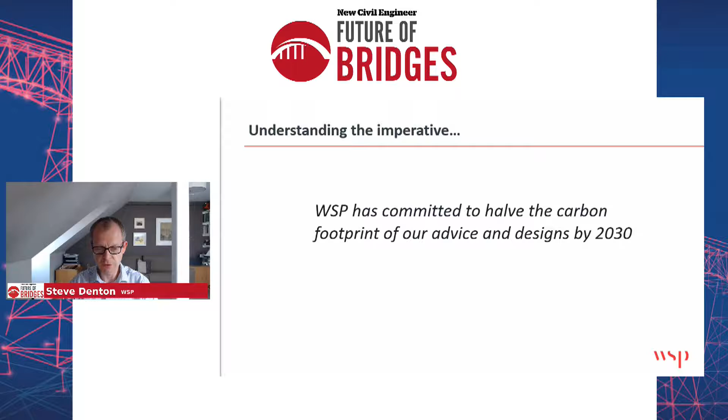My objective today is not to provide a call to arms. My colleague Rachel Skinner did that brilliantly in her presidential address for the ICE. Actually, my plan today is to focus more on how. Having been active in this area for a while, it's clear to me that we absolutely don't have all of the answers, nor are there necessarily easy answers. But it's also very clear that we can't wait until we have those answers before we take some action. For me, it's clear that we have to challenge and we need to adapt our thinking, which echoes very much what Liz was just saying. And this is what I intend to focus on today.

So I'm going to do this in 5 parts. To start off with some background, talk about the quest for precision being the enemy of progress. I want to talk about carbon conscious design, ask that question, what do we design for? And then a few slides at the end around embedding change.

To start with that background, like Liz, I think it's helpful to start with a little bit of personal background, particularly because I've often been asked to speak on other topics, but a little less on this one, although it is an area in which I've done quite a lot of work over the last decade or so. Perhaps dating back significantly to when I led the team that supported Highways England in developing their first climate change adaptation strategy and framework.

Or the work that I've been doing as part of the evolution of the Eurocode, looking at how we embrace climate change within that suite of standards. Or more recently, leading the second work stream for the ICE's carbon project, engaging with colleagues in our carbon reduction efforts at WSP, and also through academic links, looking at research and academic collaborations.

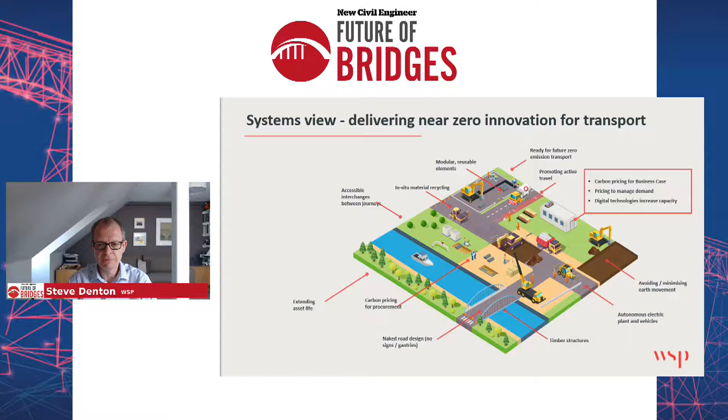The other point I wanted to make in terms of background is I think it would be remiss of me to talk on this subject without recognizing the importance of taking a systems view. This was recognized in the third work stream of the ICE carbon project. It's widely acknowledged. Whilst it's important that we look to optimize what we do within individual subsystems, we have to be careful that we don't optimize a subsystem but drive unintended consequences for other parts of the overall system. So that systems thinking perspective is clearly vital as we think particularly around carbon reduction.

Now I want to move on and ask this question: can a quest for precision be the enemy of progress? It was quite natural when, as WSP, we set that target to say, well, the first thing we need to do if we're going to halve something is to understand precisely where we are today. How can you achieve that target unless we have that granularity of understanding?

And that aligns very much with the sense of we can manage what we measure. And it aligns with the need to be able to benchmark and calculate the carbon consequences of what we do.

But I think what I've seen in this area is a little bit of a risk as well, because carbon calculations, carbon benchmarking has a number of challenges, particularly going back to that systems thinking perspective I was talking about, where a wholly asset-centric approach is inappropriate for transportation systems.

But also, I think in terms of bridge engineering, one of the biggest contributions we can make is actually around life extension of existing assets and how that can be enabled. But how do we measure the carbon impacts of that kind of effort?

It becomes a kind of carbon avoidance, and we know that we need to be really careful in how we think about carbon avoidance, because as people will have seen in the press, you can get it very wrong, and so we have to think hard around that.

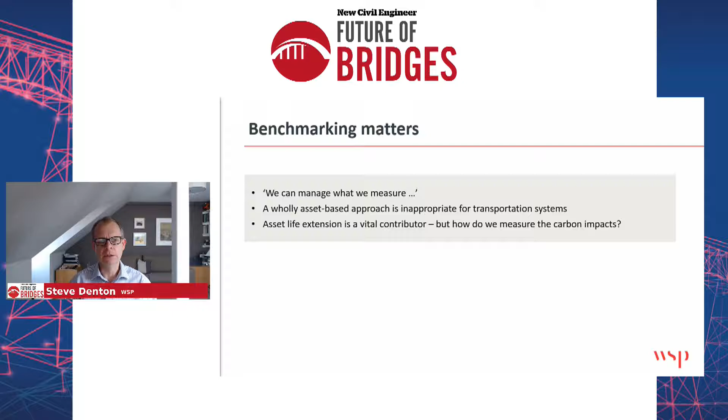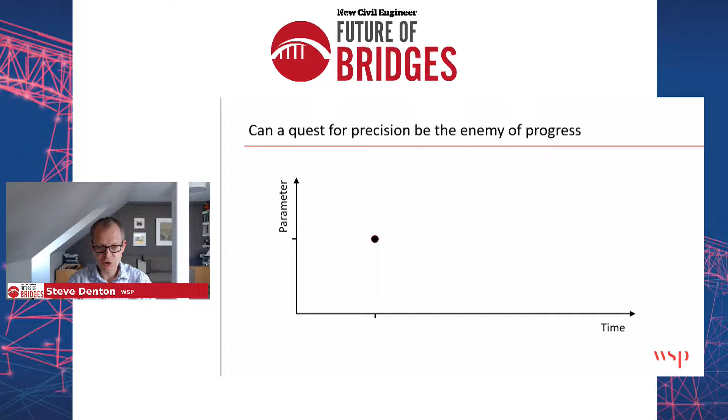So there are questions around this, and benchmarking is complicated. And I think what I observe is that sometimes we can spend a lot of time thinking around how can we measure this with precision, and agonize over achieving that precision, perhaps not thinking what the bigger picture is, which is that we need to achieve change.

And if we just focus on a particular point in time, how do we know which trajectory we're following, or even whether we're following the wrong trajectory?

And that's why I think our efforts, and actually one of the positive consequences of setting a target and thinking hard about it, is that we do need to think about how do we accelerate change.

And again, just to share with you within WSP, we've embraced a set of clear principles, following best practices in terms of how we do our carbon calculations. But in parallel with that, we're currently scoping 8 internally funded research and innovation projects where we're looking to collaborate with others to really accelerate change.

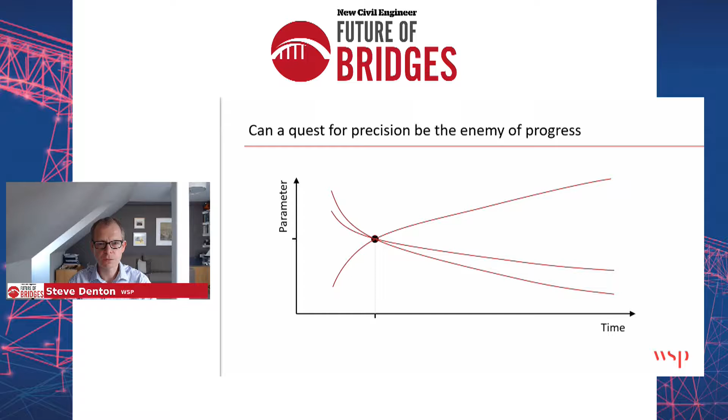Let me move on to the next topic I wanted to touch on, around enabling carbon conscious design.

So I said that part of my focus today wanted to be in that territory of how. And I guess through my career, one of the things that I've seen change is the different consciousnesses that we bring to our design activities.

So I guess there's always been cost consciousness, but I've seen increasing focus on consciousness around buildability, safety consciousness, maintainability consciousness, durability consciousness, the whole family of consciousnesses that we bring to our engineering activity.

And I think where we need to get to is to be elevating that carbon consciousness. And I think a key part here, and the point around that idea of consciousnesses, is that if we wait until the end, if we design something and then we benchmark later, we've really lost the opportunity to have impact.

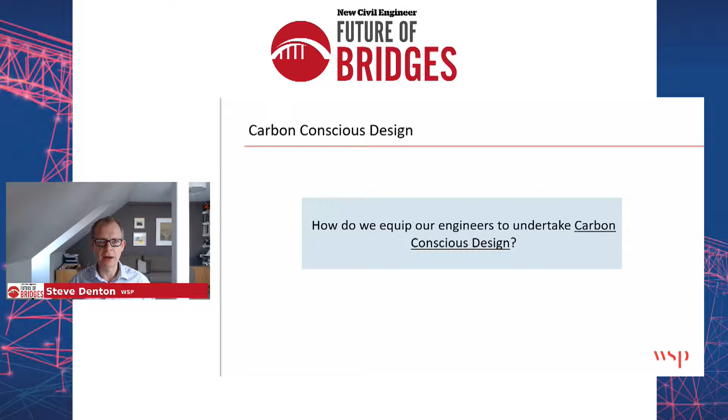The point about cost consciousness is that we think about how can we design economically long before things go out to tender and we get prices back from contractors, for example. How do we elevate and bring that idea of carbon consciousness into our design and other bridge engineering activities?

And very similar concepts of carbon hierarchy are included within PAS 2080, which many of you will no doubt be familiar with. But I think from a bridge engineering perspective, it starts to help us to understand what that consciousness might look like, and I think opens up some really exciting challenges for us.

So at the bottom end, around building efficiently, how do we use less material?

I think it's very interesting when we look through the history of civil and structural engineering that at times when materials were in short supply or were disproportionately expensive, and therefore material efficiency was a real drive, it actually led, I think, to some really exciting times in structural engineering, and often led to some very elegant and beautiful structures being designed because of this desire for material efficiency.

So I think that's a really exciting challenge for us. Building smart, how do we use low carbon materials? How do we make sure that we are fulfilling our same objectives for particularly long life assets whilst reducing the carbon impacts of the materials that we're using?

Or looking higher up the hierarchy, and clearly we need to go higher up the hierarchy to hit the overall targets.

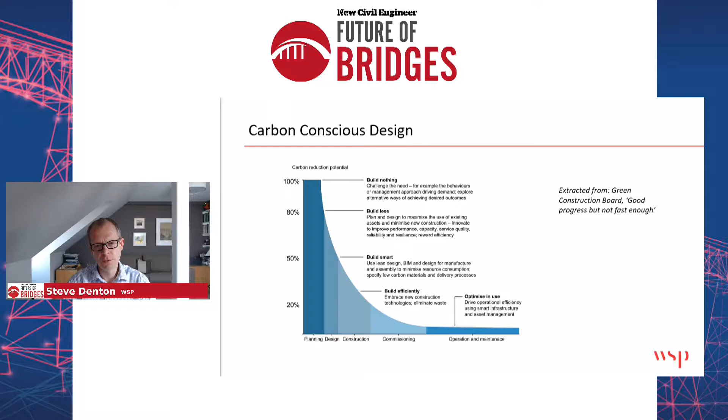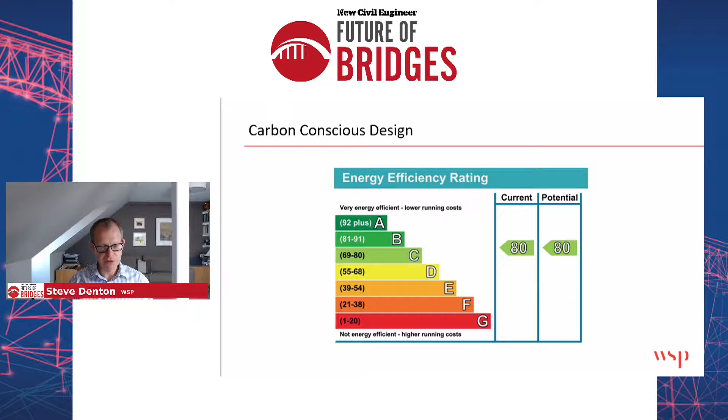I think what we're also looking to do is demystify some of this. We've all seen these: when you buy a washing machine or a house, they come with an energy efficiency rating, a simple device that enables us to rapidly understand the energy efficiency consequences of different things we might use. What we're exploring at WSP is asking, can we do something similar around the carbon consequences of the materials or approaches we might use? How do we make this simple so that at a concept design stage, when a lot of the really important decisions get baked into a project, we can bring that carbon consciousness readily to design at the earliest stages?

Let me move on then. I've touched particularly so far on carbon reduction, and I want to turn now towards climate adaptation, and this builds really nicely on what Liz was saying about change and disruptive change, but also the mega trends that we are seeing.

One of the things we ask all of our people to do within WSP at the start of a project is to pause for a minute and think about whether what we are embarking upon is what we call future ready. That simply means thinking about those trends and asking: is what we're looking at not only suitable today, but also for the future? We're thinking exactly as Liz said, around the trends in demographics, climate, resources, and technology.

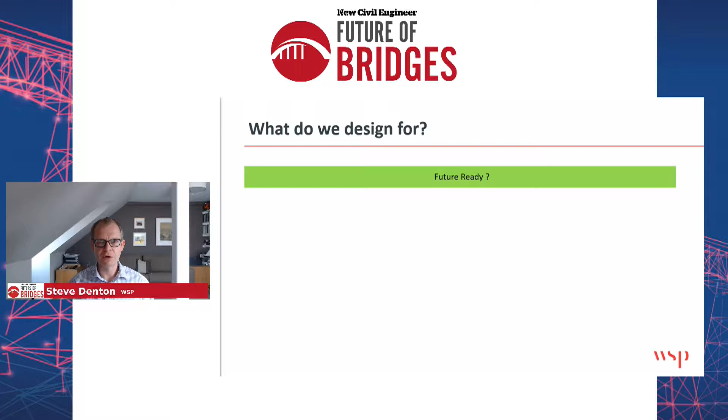What that opens up, I think, is some really interesting opportunity to ask: what do we actually design for? Some of those trends are clear in direction of travel, but the degree to which changes will happen carries uncertainty, particularly for long life assets like bridges. So how do we start thinking differently about design, particularly where the functional demands on what we're looking at over their life will change? We've tended in the past to assume stationarity of climate, for example, and we know in the future that's not something we can rely upon.

So how do we tackle this? Here are four different ways of thinking about the question of what we design for. Do we just design for new defined provisions? I'll come on later to talk briefly about the Eurocodes and their evolution in terms of what we're seeking to do there. But I think there are also some really exciting alternatives.

What about design for adaptability? We don't know exactly what a change might be, but we know there's something we might want to do in the future. Why not create that adaptability in what we design from the outset?

Or design for resilience, where our asset performance is insensitive to change. That's something as bridge engineers we understand because we're used to thinking about robustness. Unplanned or uncertain things might happen, but a structure's resilience to that change, its robustness, is influenced by things like providing continuity within the structure or ductility of elements. These things can be significantly beneficial in terms of the sensitivity, or insensitivity, of assets to change.

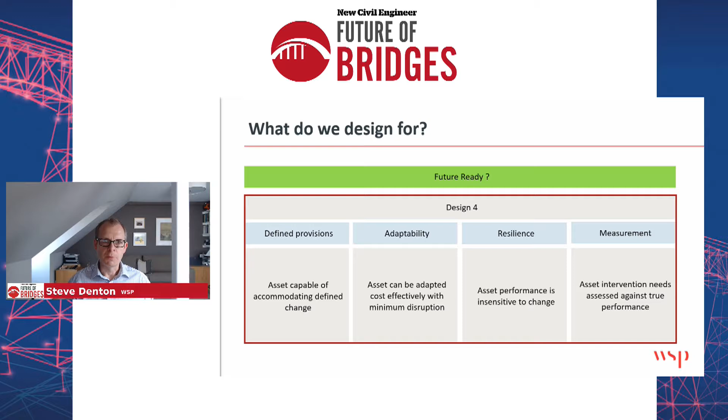I think bringing in some of these different mindsets potentially helps us get away from what might be a vicious circle of worrying about change, over designing, and then potentially using increasing carbon quantities, versus that virtuous circle, which is the one we want to be on.

So let me wrap up and talk a little bit about embedding change. Liz talked about the need for skills within the industry, and I've talked about how we need to equip ourselves as engineers to bring carbon consciousness to the work we do. But we also operate within a framework, a system. We work under contracts, procured in a certain way. Regulations exist, there are standards. One bit of feedback from the ICE work and some surveys was that people feel inhibited sometimes by that framework within which we operate.

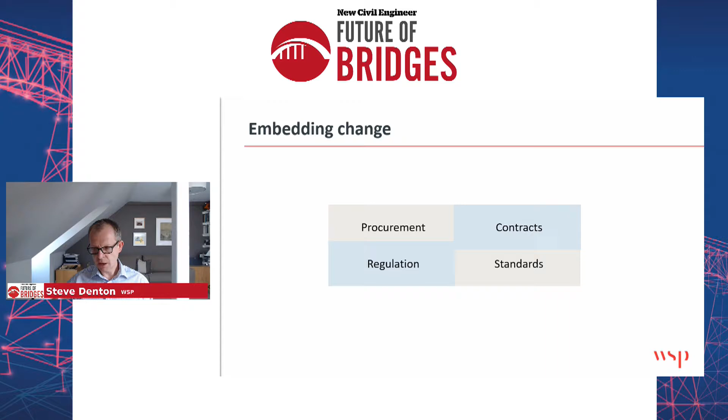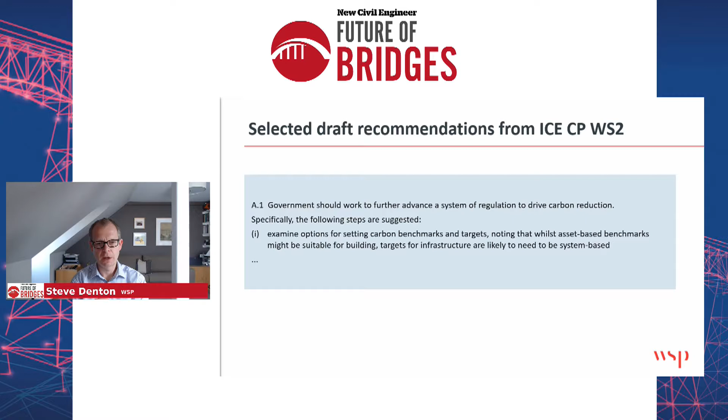Under the ICE Carbon Project, in the section around regulations, standards and contracts that I've been looking at, there are some emerging recommendations. One, that government needs to advance a system of regulation to drive carbon reduction. We've set out specific thoughts here, particularly recognizing that for infrastructure, any such targets or regulation is likely to need a component that's systems-based rather than asset-based, which might work in the property sector.

We've also made a series of recommendations in the standards domain. Firstly, standards developers need to introduce a process of carbon impact assessment for new or revised standards. It's great that Highways England, and I'm sure others will follow soon, have introduced just that kind of process into reviewing changes to standards. But importantly, there's also a need for proactive action here - the second recommendation is about removing barriers to efficient material usage, and more importantly, the usage of low carbon or recycled materials.

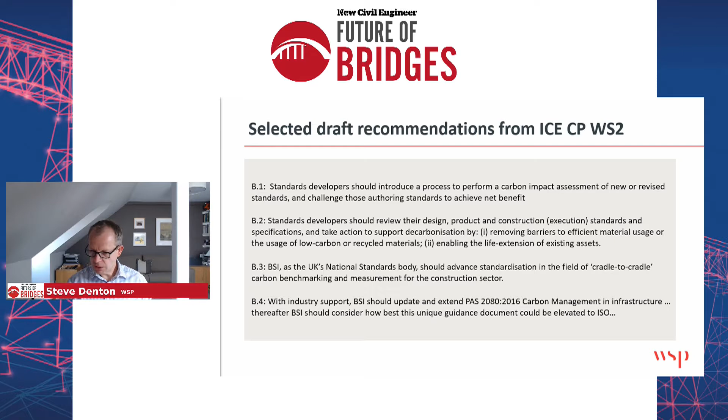So those are some emerging recommendations from the ICE Carbon Project. I'll wrap up by mentioning a little about Eurocode's evolution. As many of you are aware, we're currently engaged in a massive project to develop the second generation of the Eurocodes, and I'm responsible for leading that in my role chairing the overall committee CEN/TC 250. One of the requirements of the mandate we received from the European Commission for this work was to think about climate change and how to take account of it within the evolution of the Eurocodes.

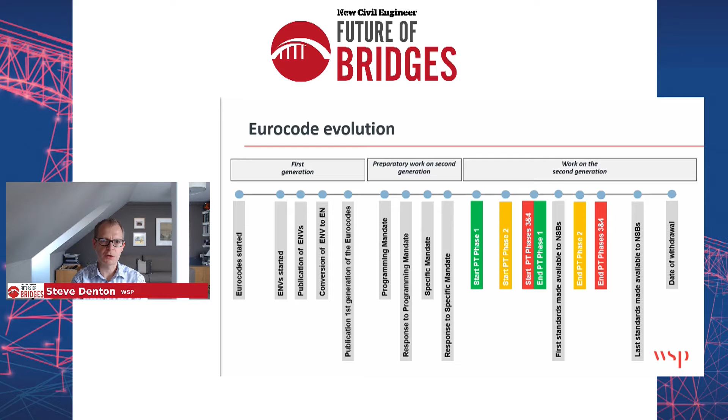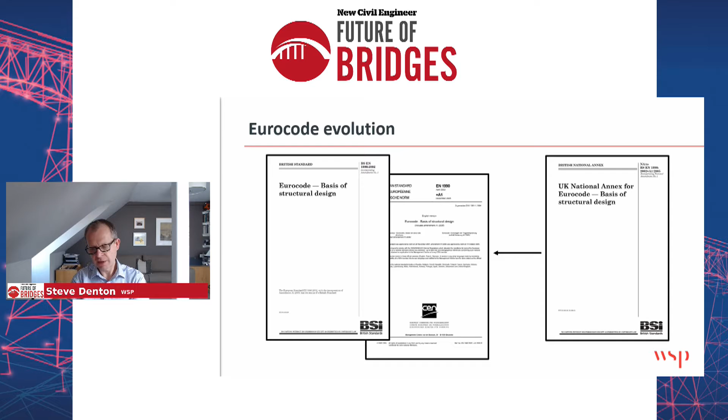Clearly, one of the key factors is what we do in relation to environmental actions, principally wind, snow, and thermal actions. In terms of the magnitude of those actions, these are included within national annexes - the Eurocodes themselves provide the framework, the template within which you use those specific values.

So where we're heading with the Eurocodes on this - and this is still in draft, needing to go through inquiry and formal vote, but has good support from the 34 countries engaged in Eurocode development - is that we retain essentially the current model where we have wind maps, snow maps, thermal maps within national annexes, but we also give national annexes the opportunity to introduce a scaling factor applied to those values to take account of climate change, and to provide flexibility to go beyond that if a client wants to on a project-specific basis.

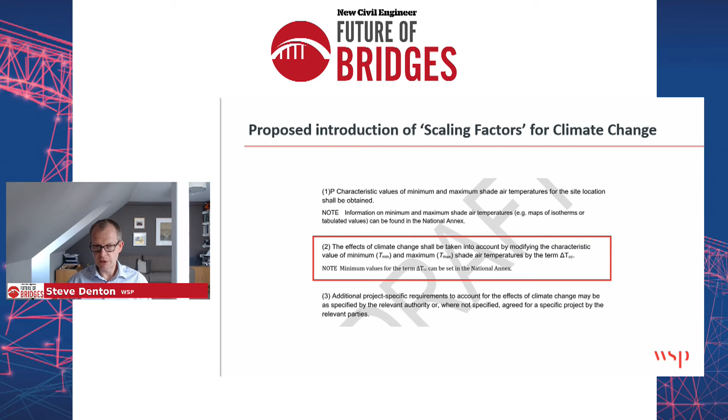For wind and snow, it works to have a scaling factor which is a multiplier. When we look at temperature, that scaling factor needs to be a delta. There's research underway to look at how these scaling factors might be derived, and it's not straightforward - there's complexity here. But there's been really positive engagement with the European Commission Mandate 526 team, and with the Copernicus Climate Change Service, who asked me to speak at their General Assembly about what we're seeking to do. Because where we need to get to is that integration of thinking around structural reliability and climate science, so we can help national standards bodies develop the parameters to put into their national annexes.

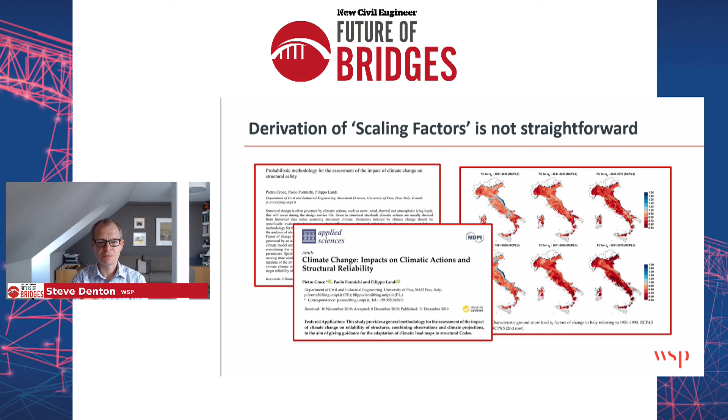So let me finish there. I hope that's been interesting, and thank you very much for your attention today.